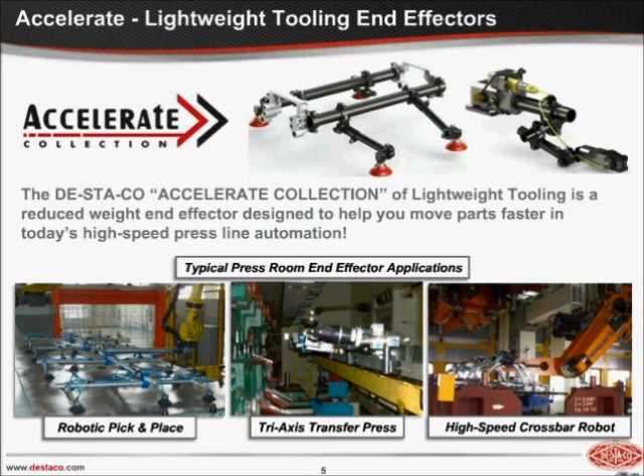The next slide shows what we've started to look at based on what customers are telling us to do. It really hit us strongly when our customers started asking us to help them increase speed. So we went to our customers and asked, what are you looking for in the end effector?

When we look at weight reduction especially, the first key thing that came up was they don't want to be forced to purchase expensive carbon fiber or other alternative materials. So what that's telling me is most of the carbon fiber out there, although costs are going down, is still very costly and has very long lead times compared to an aluminum type structure.

The second thing is the tooling is too heavy on our automation and on our people. What I mean is when you look at the weight of the tooling on a robot, the heavier the end effector is, the more taxing it is on the automation or robot, as well as on the people on the floor.

Most of the automotive stamping is still using a traditional manual tool change function, where the person on the floor has to take the tool from a storage location, move it to the robot physically himself, and put it onto the robot. Those end effectors can get very heavy.

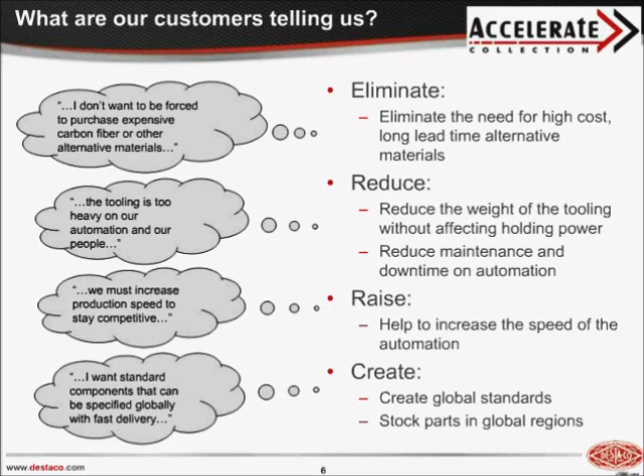So what did we do? Some of these things are what we looked at as a development team, and not just in North America. We looked at it as a team globally, with our groups in Europe, primarily Germany and the UK, and also our teams in Thailand, China, India, as well as South America. As a group, we looked at what we can do to help our customers improve their automation.

So the first thing we looked at was our material.

Customers told us they don't want to buy high-cost carbon fiber. So what we did is we looked at what can we do with different strengths of the aluminum. And we found a higher strength aircraft grade type of aluminum to reduce the clamping wall thickness of our components.

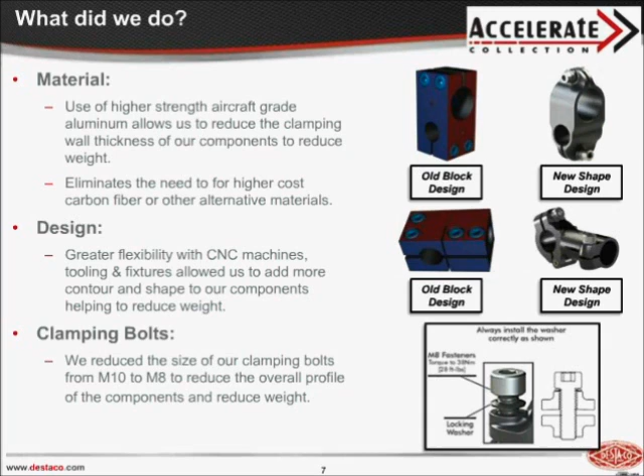Our bolts - this might not seem like a big issue, but for us it has been. Traditionally we've used M10 bolts to clamp around our components. When we moved to the M8 style bolt, it was a big change for us. It helped us reduce the profile of our components without giving up the strength. With the thinner wall and higher strength aluminum, going to a smaller bolt did not hurt any of the clamping power we needed to hold the end effector frame. So we reduced it from an M10 to an M8, and that gave us an overall reduction in the profile.

Some other techniques we looked at were what we could do with the finish of our components, being an anodized aluminum - would that help us increase holding power just by adding some friction? In our testing it really showed a big difference as we anodized and used different techniques with the anodize. It added just enough friction in the modular components and around the tubing to increase that holding power. Again, reducing wall thickness, reducing the clamping bolts, and adding some finish to our components helped keep the holding power and strength in our tooling.

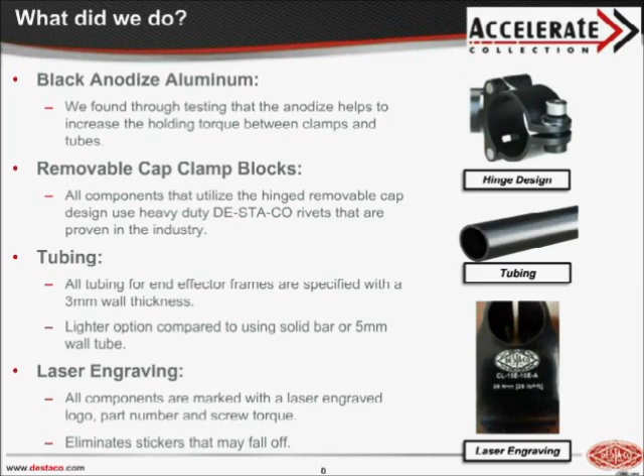So let's talk about some results. One of the key things that we wanted to do was increase speed. In talking to some of our current customer base, we've been able to lighten the components and eliminate the excessive bounce in some of the robotic applications, and they've found an increase in speed of 25 to 30%, and in some cases even greater.

Now in a stamping plant, especially automotive, that could be 1.5 to 2 strokes a minute, which is a tremendous increase when you're talking production for body panels.

When I talk about bounce due to the automation, a lot of times with a heavy end effector, when it picks up material out of one die to transfer it to the next, there's a lot of excessive bounce in that end effector. So the robot needs to stop or slow down to eliminate the bounce before it can go into the next operation. A lighter tool has helped us reduce that bounce so the robot can continue the transfer without slowing down.

Lighter components have reduced the strain on the automation, meaning the robots aren't being overloaded anymore. We can overload those robots by adding a little more weight to try to push them, but that puts a lot of strain on the robot and adds wear and tear, maintenance, and downtime. So again, lighter components help reduce that issue.

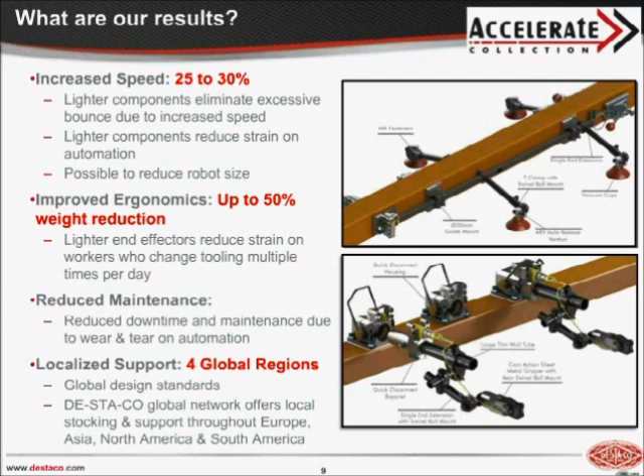As we go through, I wanted to talk about some of the things we looked at as far as industry standards. With the new end effector frame, we still need to be able to mount to standard components.

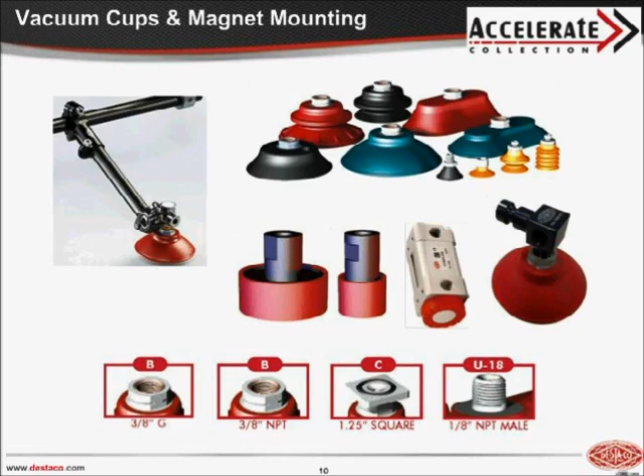The next sheet shows the vacuum generators. There are a couple different ways to mount vacuum generators, and I'm talking specifically Venturi type units, which are vacuum generators over every cup.

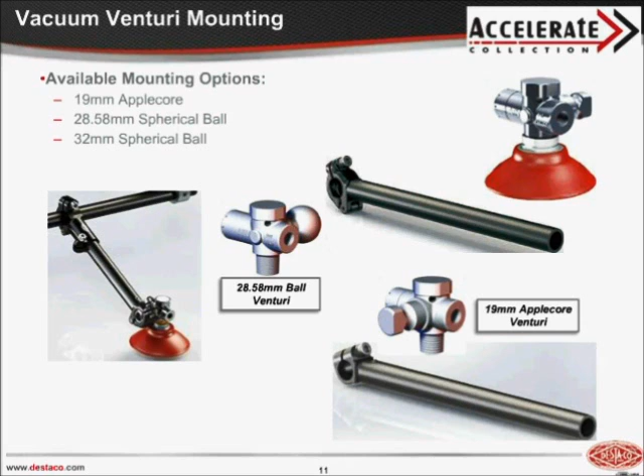Typically in the industry right now, there's what's called a spherical ball mount or an apple core type mount. We have both: a 19 millimeter apple core Venturi, a 28.5 spherical ball, and also a 32 millimeter spherical ball. We've been able to utilize our designs to mount to every one of those different industry standards. We have to think about this stuff when you come up with something new.

I talked about the tri-axis type tooling at the beginning, and you can see there's a sheet metal gripper on the right, a cam action style gripper, but also in use with shovels. We have to be able to mount to shovels in typical tri-axis transfer press applications. Customers will make their own corner shovels, sometimes they call them gauges, but we've adapted standard mounting designs to those shovels typically used in the industry. So our end effectors that we've come out with new are able to mount to any style of sheet metal gripper and any style of shovel out there in the industry.

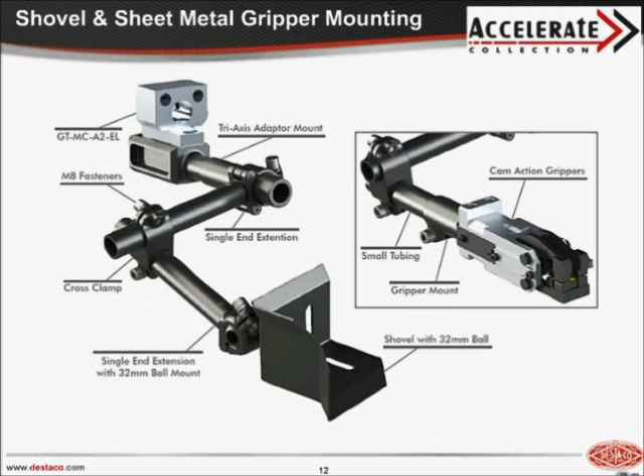Now let's talk about mounting to the automation. This is a very key point when you're designing a new cell or a new automation line going down your plant. You have to think about how we mount the end effectors to the robot, to the automation, or to the transfer rail. So we have to be able to mount to current standards, and we know the robotics industry has come out with some good standards. We've adapted our components by using some standard plates that go directly to our tooling. We've also come up with standard mounting patterns to go to transfer rails. So depending on whether you're using a robot, a transfer rail, or automation, we've been able to adapt to any one of those standards. And if there's something new that we don't have, we have an applications team that can easily make a custom style end effector or a custom mount for any type of application.

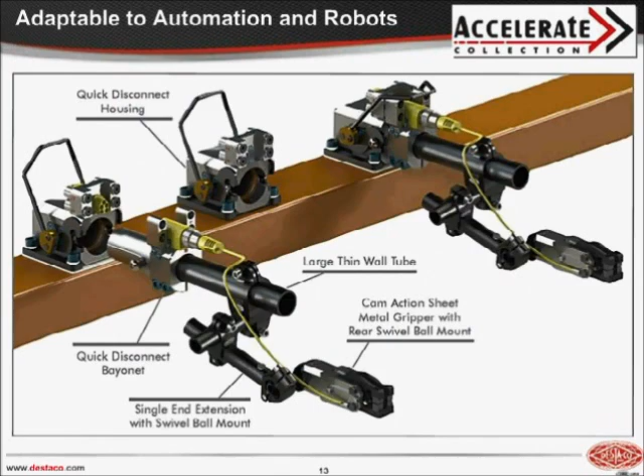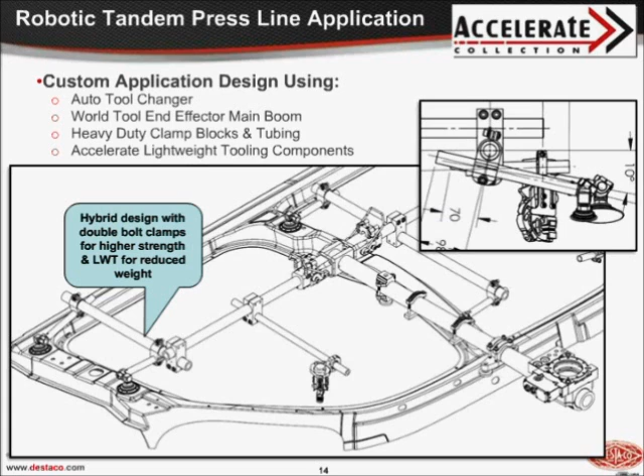Lower tooling - I wanted to talk a little bit about the lower rest stations. We can't forget about these things because they're an important part of transferring material from one operation to another. If there's a point where you have to drop off your material, we can build nest stations with our end effector tooling. Sometimes they're called idle stations, idle buck stands, nest stations, or rest stations - whatever you call them. You can use our end effectors to hold the material for the next robot to pick it up and transfer it to the rest of the process.

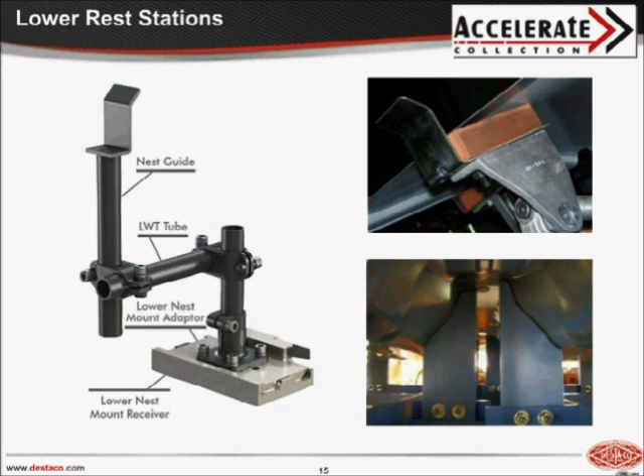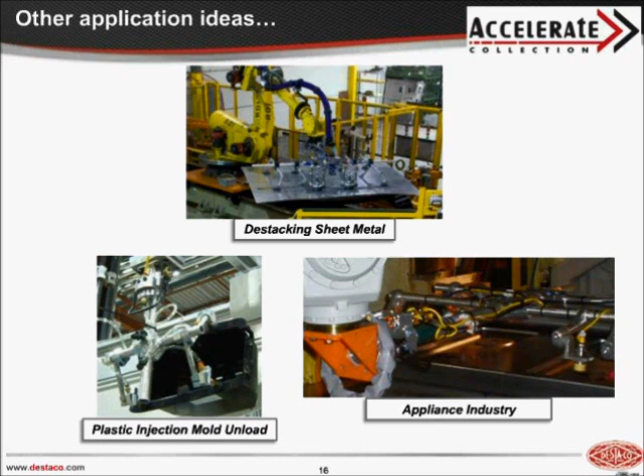So how do you get to some of these components? We've really tried to make good use of our website—I've taken the time to put all of our components and part numbers right on the DESTACO site. You can get to the end effector section just by clicking products, and the drop down will show the lightweight tooling Accelerate collection. Click on that and you can go directly to the components.

I also added a place on the website where you can see applications, photos, or videos of how the end effectors work, to get a better idea of how to use them. We also have a CAD library you can download directly from our website in your native format, whether it's CATIA, Unigraphics, or SolidWorks. Having native data was very important for our automotive customers, so they have the history and can create mass properties of the end effector if needed.

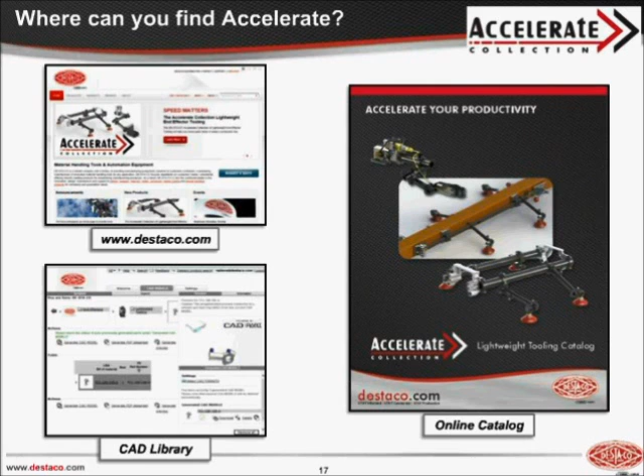You can also download the catalog directly from our website. It has all the tooling I showed in the presentation, the different designs of our clamp blocks, the tubing, our vacuum generators—feel free to download that. Lastly, here's my contact information. You can call me direct, or go to our website for regional contacts—if you're in Asia or South America, you can find that contact information there.

That's all I had. I really appreciate the time, and I hope this was helpful to some of you. I'm very passionate about end effectors and really passionate about helping our customers increase the speed of their production. So thank you once again, I appreciate it.